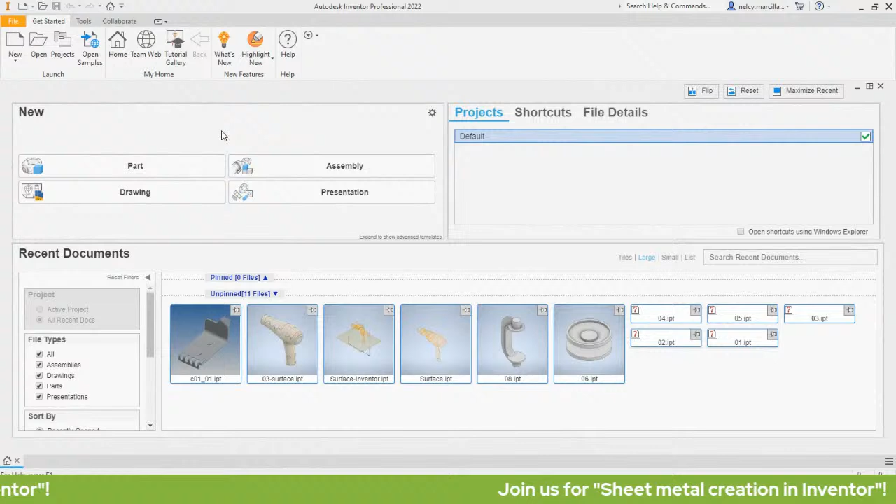Okay, so this is the interface of Autodesk Inventor 2022. First, let's click New. This window will pop up, selecting Sheet Metal millimeter.ipt, and click Create.

Okay, so opening my Inventor. Okay, so let's first...

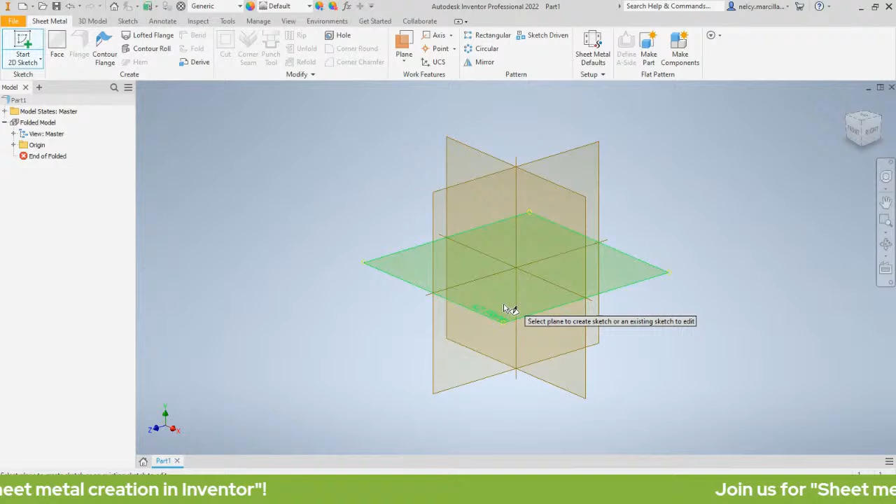Draw a sketch. Head over to Start 2D Sketch. We are prompted to select a plane, so I'm going to select our XZ plane, left click, and we'll be sketching on our top plane.

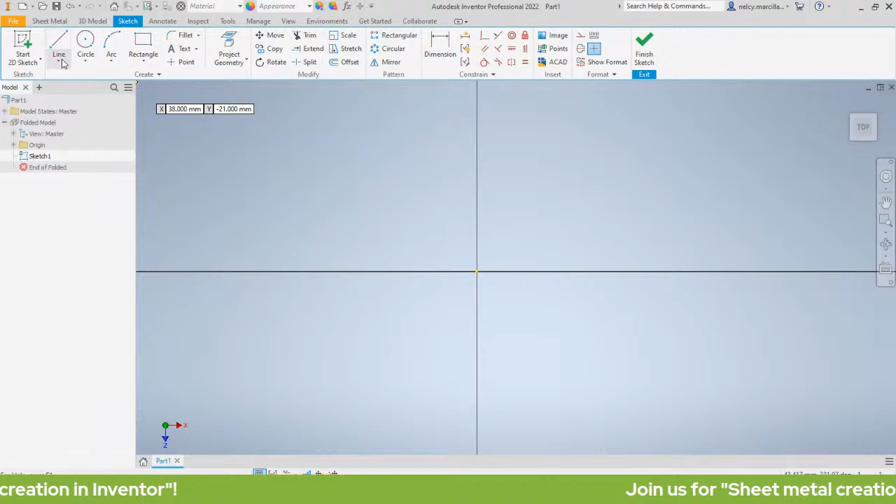Okay, press L for line. L is the shortcut key for line, or you can grab the line tool under the Sketch tab. Let's place our first point here at our origin, left click. Notice the vertical inferred constraint active. Let's double left click to exit the line command.

Okay, so notice line is still active. Let's place another line here, left click, moving it down. Left click, moving it down.

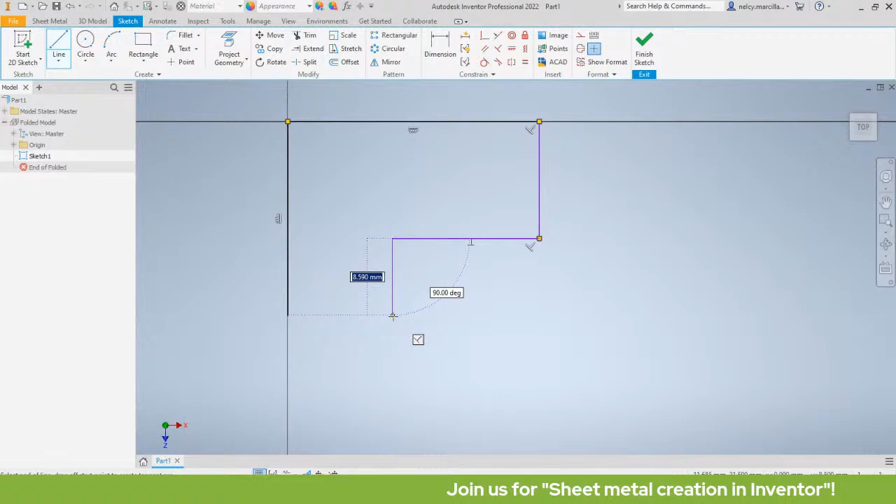So let's do snap tracking. Okay, left click. Let's hit escape to exit. Our next intent is to create an arc here.

Head over to the Sketch tab, selecting Arc. So we have three kinds of arc: 3-point, tangent, and center point. For this one, I'm going to use 3-point arc.

Okay, placing the first point here, left click, and left click. Let's hit escape.

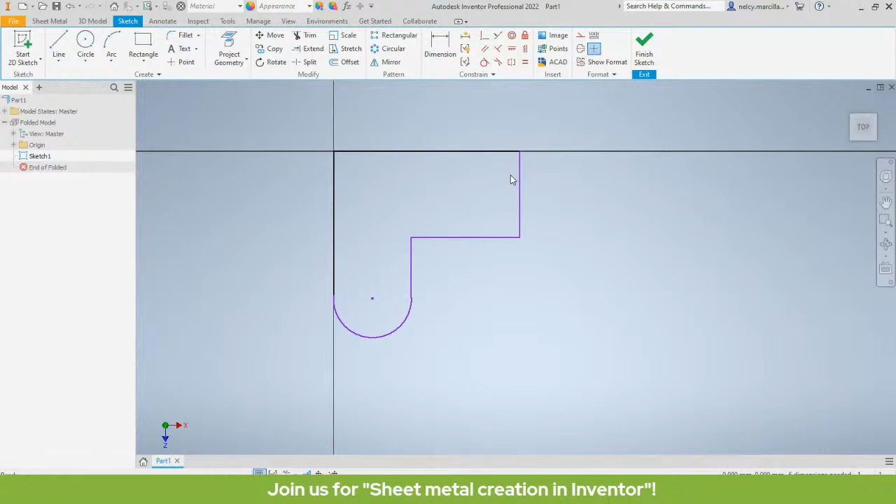Okay, so now notice here, 6 dimensions needed. You can grab dimension here, or press D on your keyboard. So selecting this line and this line, moving it up, left click, let's key in 44.

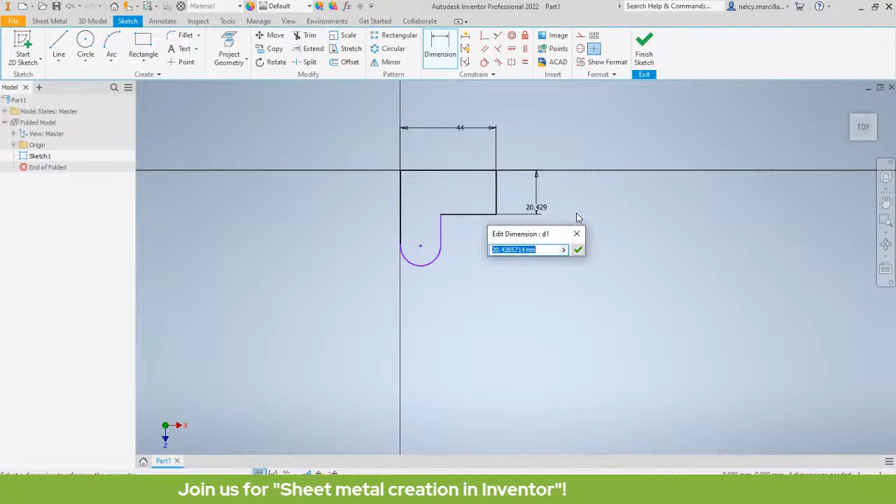This line and the center point of this arc, left click here and key in 32. Okay, so let's now add dimensions to our arc, left click, and key in 4.

Okay, let's hit escape. Okay, inspecting. Okay, so...

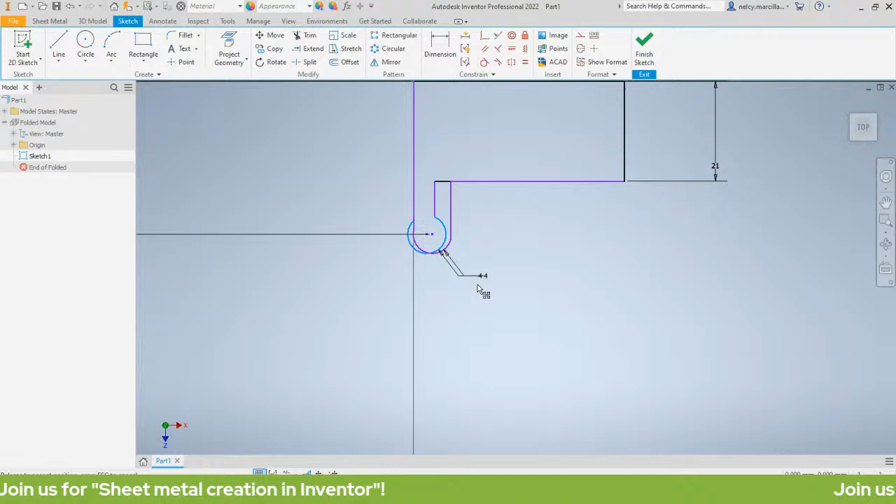What constraints? Post in the comment section: what is the right constraint to make it smooth, to have a smooth transition between this line and our arc? If you know, just post it in the comment section.

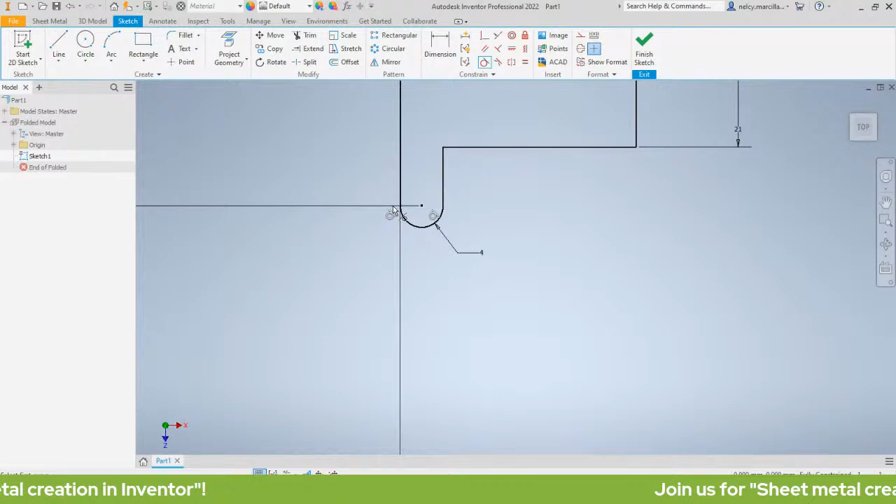Okay, so head over to Constraint. Let's select Tangent, selecting this line and this arc. Okay, this line and this arc. Notice our sketch is now shaded black, and as you can see here, our sketch is now fully constrained.

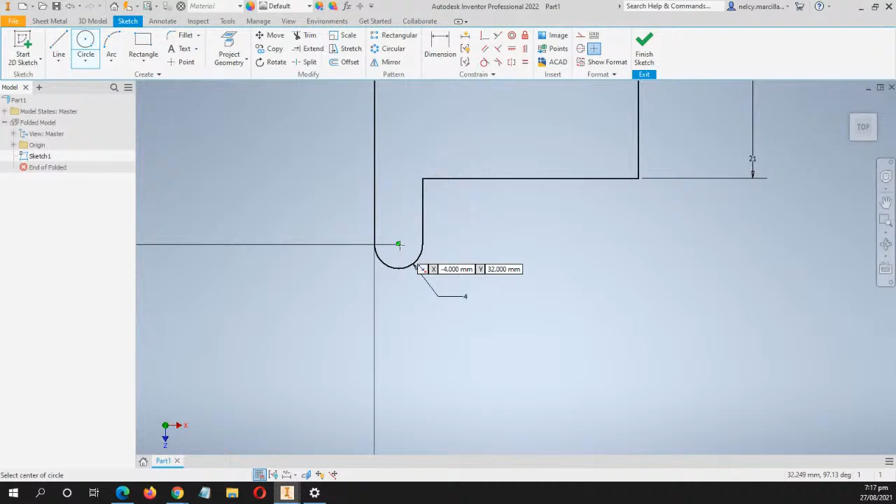Okay, so to finally finish our sketch, we're going to add a circle. Head over to the Create tab, selecting Circle. Selecting center point circle, placing it here, left click, and key in 3. Let's now click Finish Sketch.

And now we are in the Sheetmetal tab, selecting Face, selecting this face, and click OK. Notice here we have the offset direction, so you can flip it, flip side, or make it both sides. I'm going to select the first option and click OK.

Our next intent is to create a flange here. So let's create a flange.

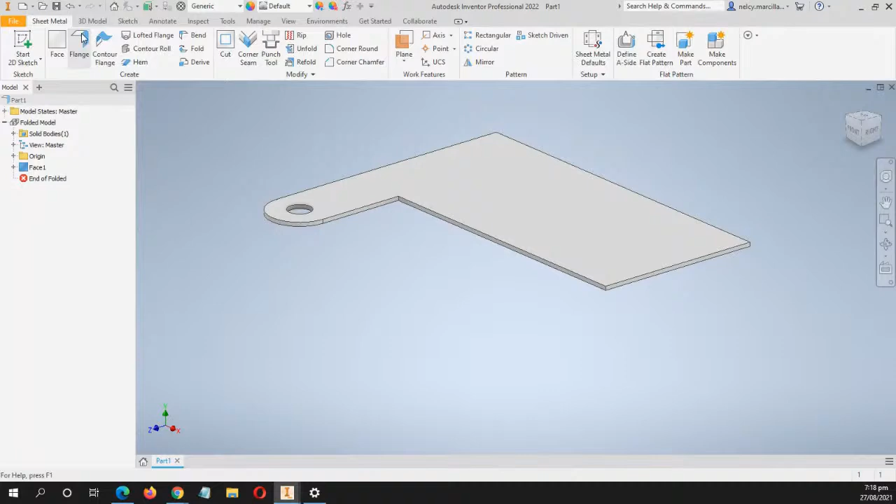Selecting flange, selecting this edge. Let's define the height. Height to be 10, degree to be 90 degrees, and click OK.

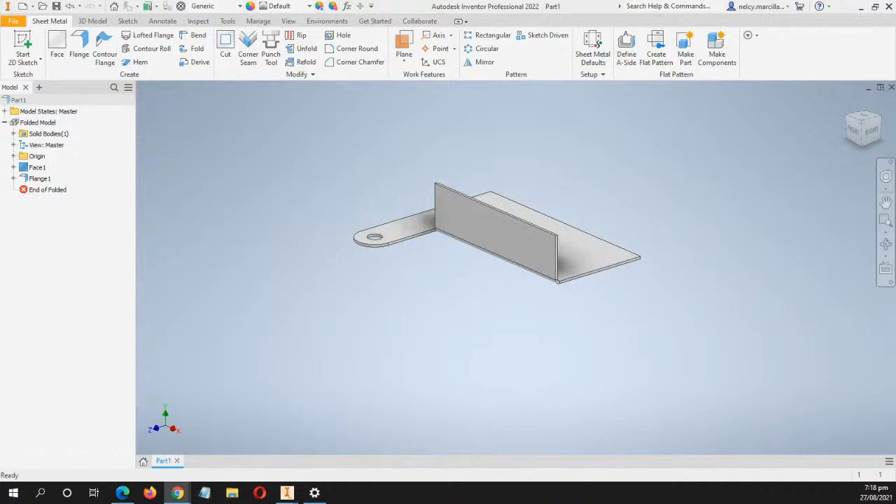Our next intent is to create a cut extrusion here. So let's select this face, right click and select new sketch. Let's arrange our orientation.

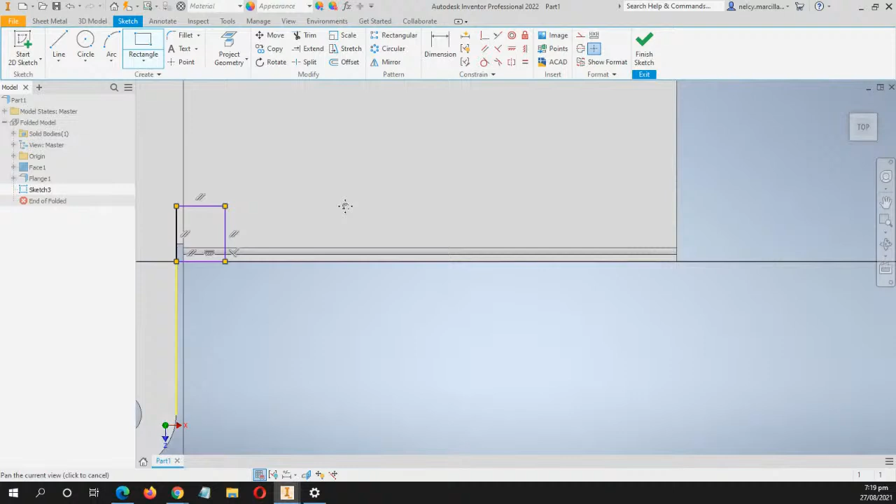Head over to create tab and select rectangle. This time I'm going to use a 2-point rectangle, placing the first point here, left click, and left click. Placing another one here, left click and left click.

Let's hit escape. Let's add dimensions. Press D for dimension, selecting this line and this line, left click and key in 5. This line and this line to be 25. Selecting this line and this line to be 5.

Our next intent is to align these lines. So let's hit escape, head over to constraint, and select collinear. Selecting this line and this line. Let's hit escape. Let's inspect.

Head over to constraint and select coincident. Selecting this point and this point. So let's place a point here. Let's create a point, placing it here. Placing the point here.

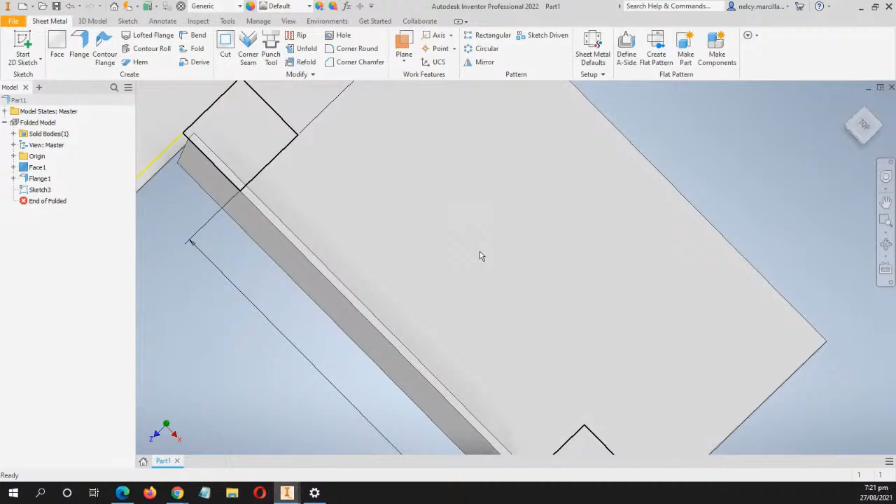Our sketch is now fully constrained. So let's now click Finish Sketch. Let's zoom out. Let's head over to 3D Model tab and select Extrude.

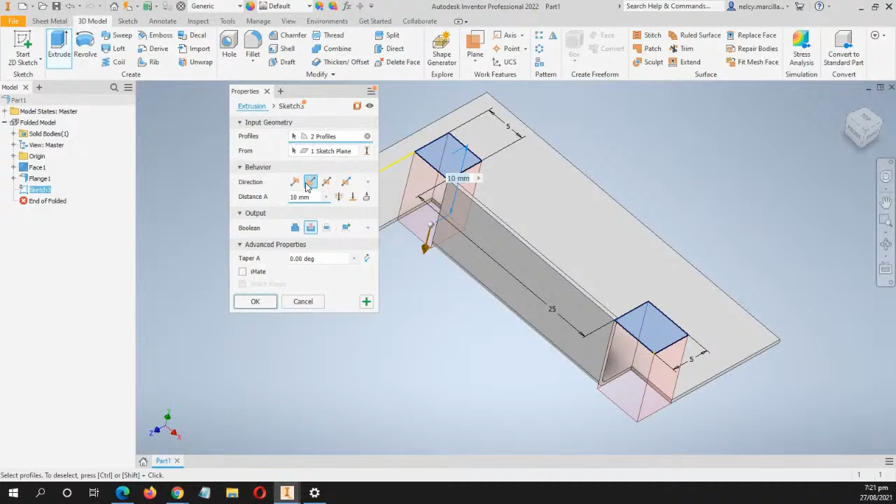Selecting this profile and this profile. So direction, this window will pop up. Direction to be flipped. Notice it automatically changed to cut. Let's now click OK.

Our next intent is to create another flange. To do that, let's head over to Sheetmetal tab, selecting flange. Let's select this edge.

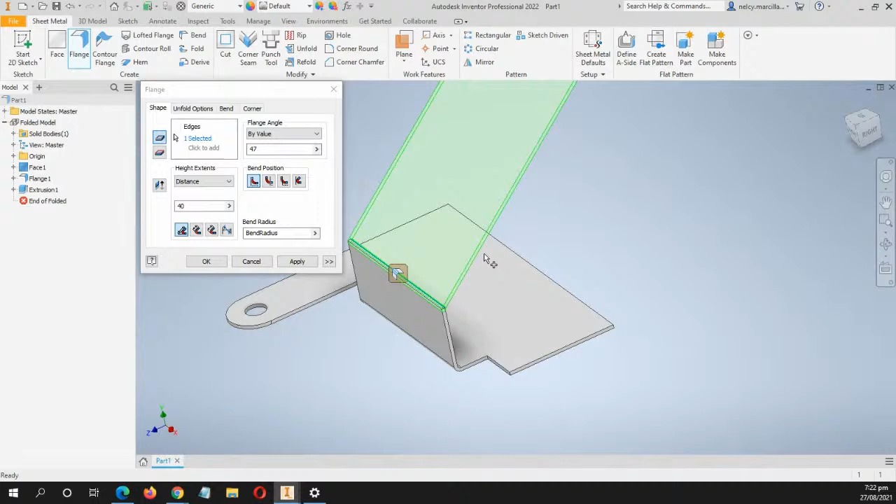Let's key in 40 with the angle of 47, and click OK.

Next, let's create another flange here to this edge. Right click, selecting repeat flange, selecting this edge. For the height extent, let's key in 16. Bend angle to be 60 and click OK.

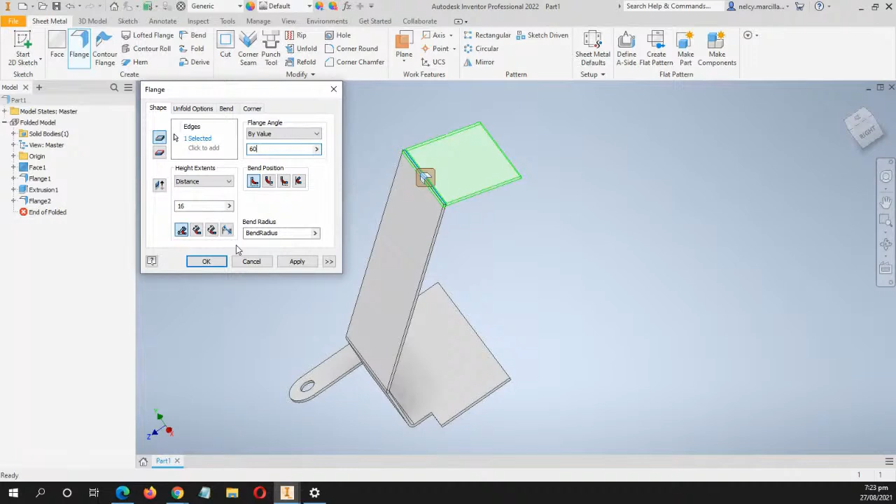Head over to home view. Our next intent is to create a circle. We are going to create a cut extrusion here, but first we need to create our circle.

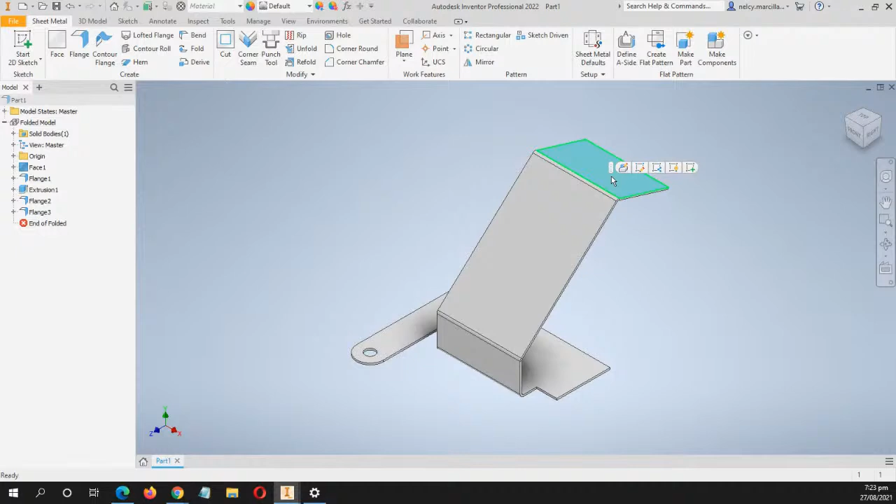So left click, right click, and select new sketch. Let's change, so we are in our top plane. Head over to create tab and select center point circle.

Locating the midpoint, notice the green circle, so that's the midpoint. Let's left click there and key in 15. Let's now click finish sketch.

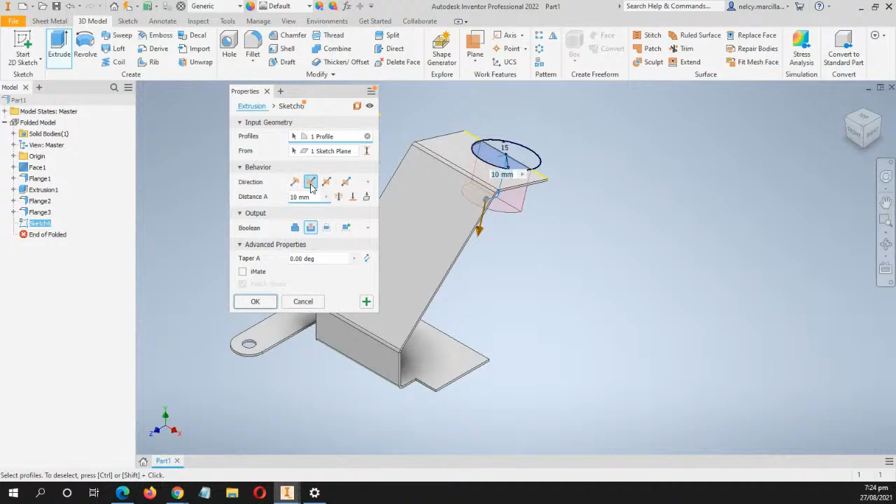Head over to 3D model tab and select extrude. Selecting this profile, direction to be flipped. Boolean to be cut, and click OK.

Our next intent now is to create a sketch on this face. Let's right click, selecting new sketch. Press L for line. Let's create a line here, left click and left click. Let's hit escape. So this line will serve as a helper.

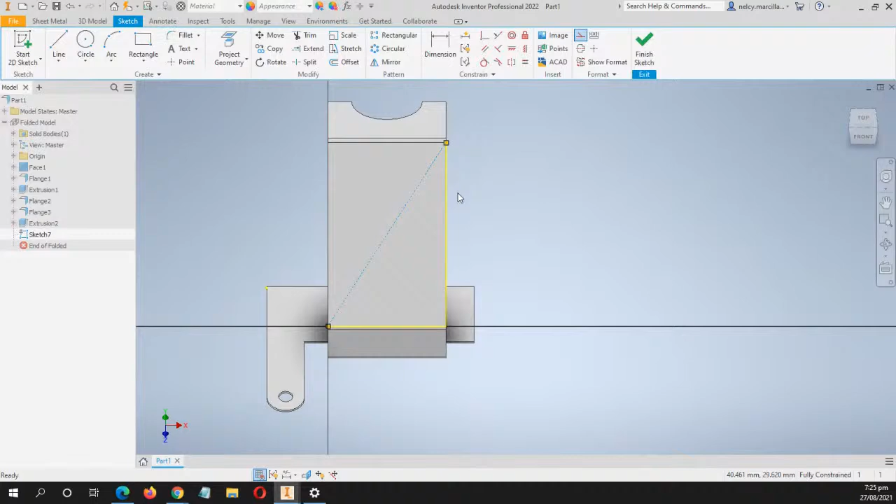So let's left click, right click, and turn it into a construction line. Let's now create a slot.

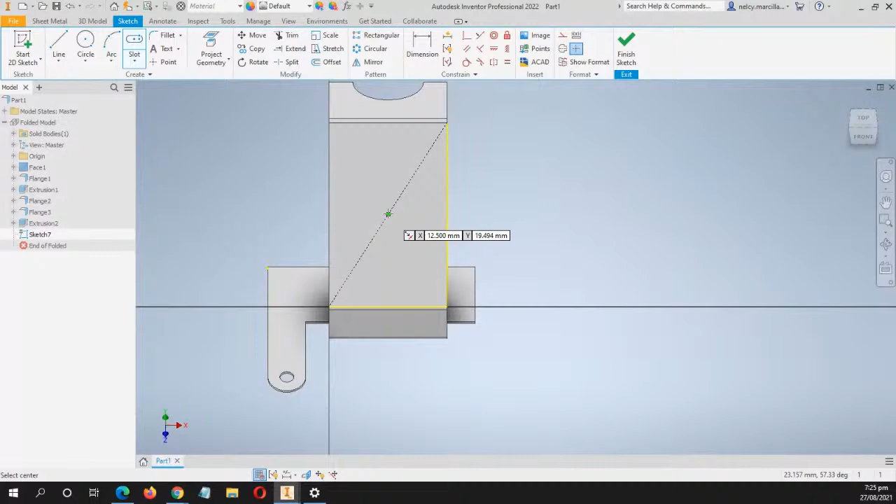Head over to create tab, selecting this drop down and select center point slot. Let's locate the midpoint of this line, notice or locate the green dot. Left click here, moving it up, and left click.

Notice the vertical inferred constraint. So once you see your vertical constraint, that's the time when you need to left click. And left click.

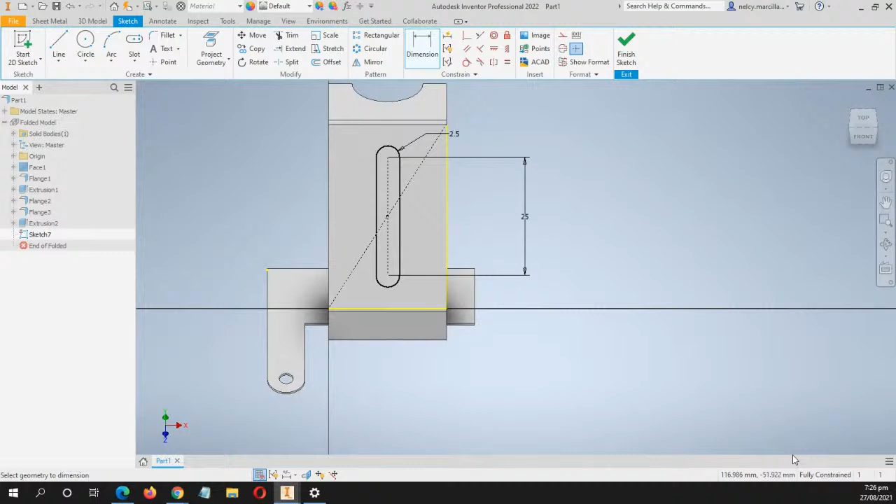Press D for dimension, selecting this line, left click, and key in 25. Selecting this arc and key in 2.5. Our sketch is now fully constrained.

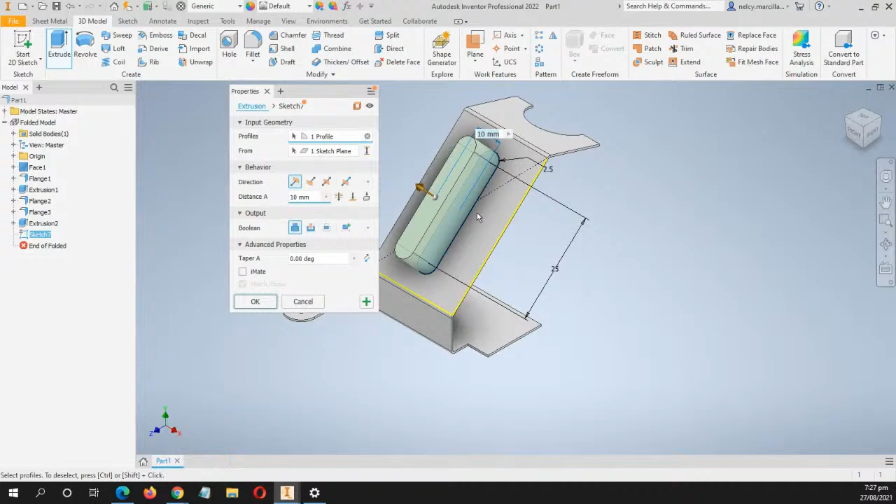So if your sketch is not fully constrained, feel free to use constrain. Let's now click finish sketch. Head over to create under 3D model tab and select extrude. The profile is automatically selected, so direction to be flipped. Let's now click OK.

Okay, so let's create another face here. To do that face, we need to create the sketch. Selecting this face once more, left click, selecting new sketch.

Press L for line, locating the midpoint of this edge, left click, and key in 10. Let's hit escape. Press L once more. Let's create a line here, left click. Notice the horizontal inferred constraint. Double left click. Let's create another one here, left click and left click.

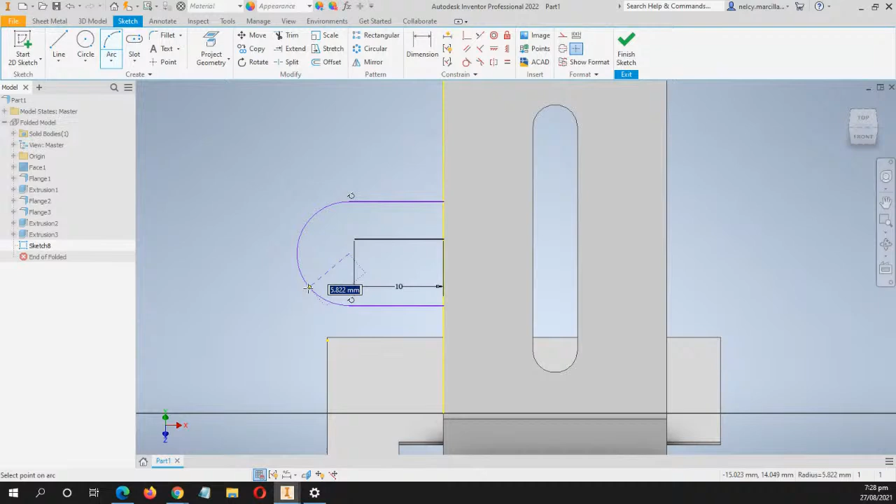Let's hit escape. Let's now create an arc. Selecting 3-point arc, left click, placing it here, left click, and left click. Notice the tangent inferred constraint appeared. I'm going to left click.

Head over to constraint, selecting coincident, selecting the endpoint of this line and the center point of our arc. Press D for dimension. Let's define the dimension of this arc. Let's key in 5.

Let's hit escape. Let's turn this line into a construction line. Left click, right click, and select construction. Let's now create a circle, placing it here, and key in 5. Let's hit escape.

Our intent here is to join the center point of our arc and our circle. So we're going to click concentric, selecting this arc and our circle.

Let's now click Finish Sketch. Head over to Sheetmetal tab and select Face, selecting this profile. Notice the preview and click OK.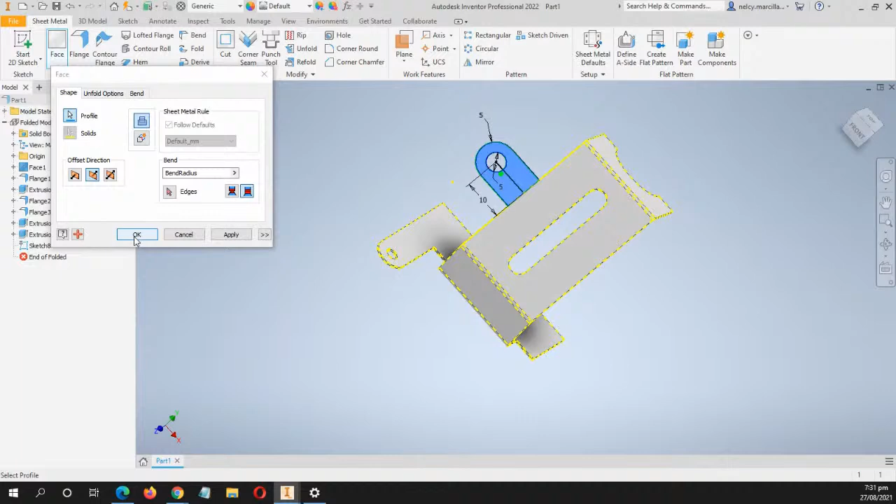Okay, so we are done with our first sheet metal in Inventor.

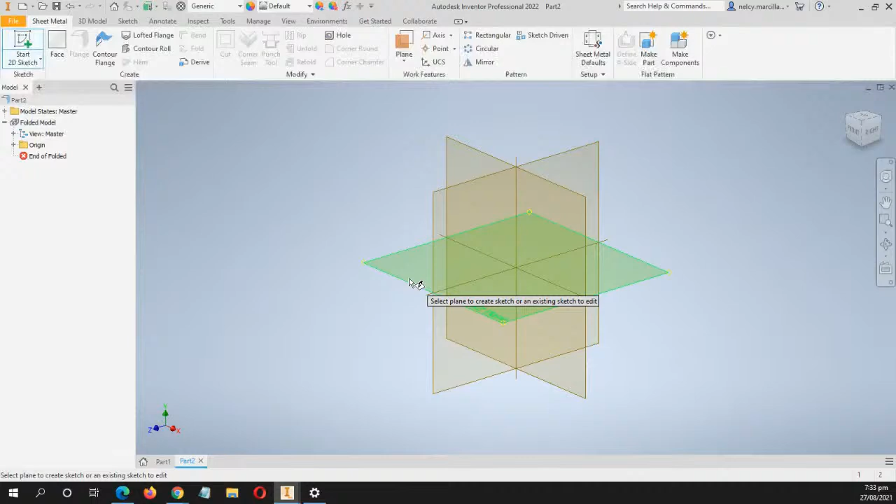Let's head over to home, selecting new, Sheetmetal mm.ipt, and click create. So Start 2D Sketch, selecting our XZ plane, left click.

Let's grab our rectangle, selecting 2-point center rectangle, left click on our origin. We are prompted to input a value, so let's key in 100, hitting tab and key in 50. Zoom in.

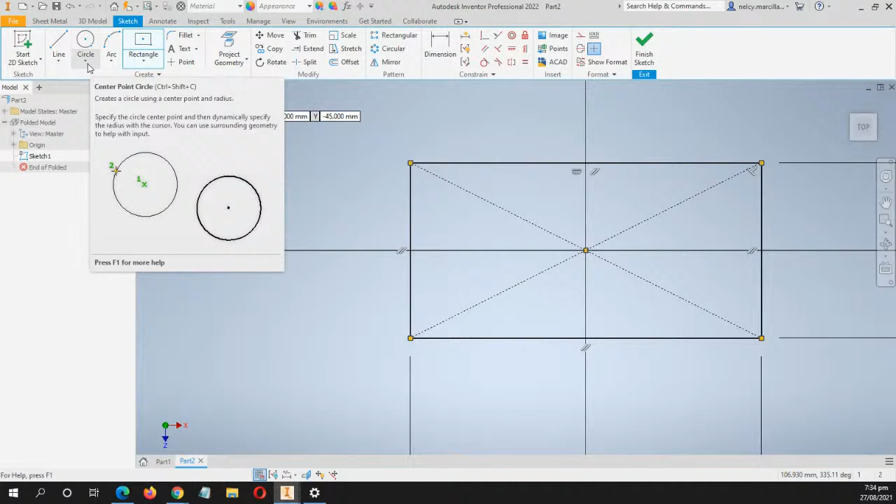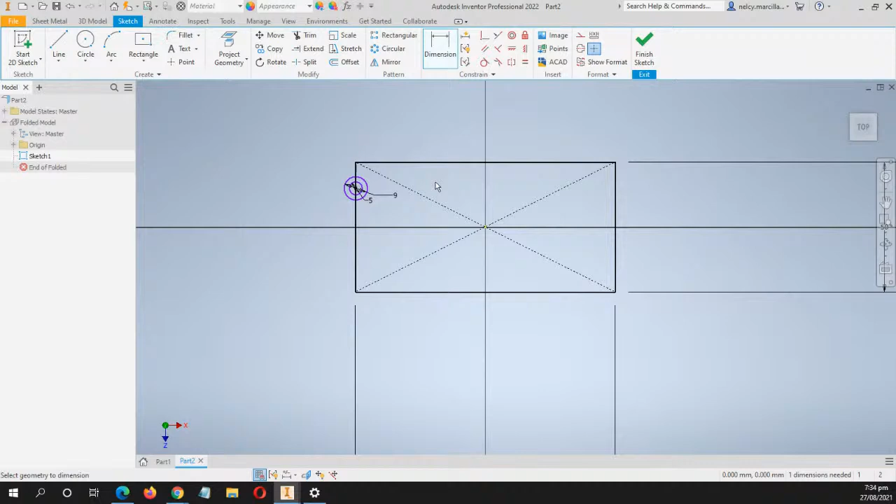Our next intent is to create a circle here. Grab the circle in our create tab, selecting center point circle, left click. Left click here, let's key in 9. Circle is still active. Let's create another one here and key in 5. Press D for dimension, selecting this point and our origin and key in 12.5.

Our sketch is now fully constrained. Let's now click Finish Sketch. Our next intent is to create another sketch on our front plane. To do that, let's click Start 2D Sketch, selecting this plane, our XY plane, left click.

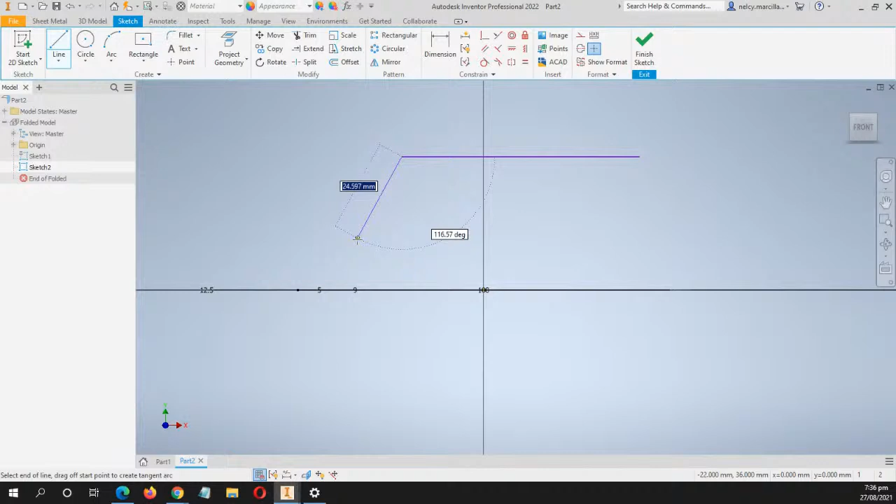Press L for line, left click. Let's left click once you see the horizontal inferred constraint. Left click. Hitting escape, press L once more. Let's create a line here, left click, left click, left click, and hit escape.

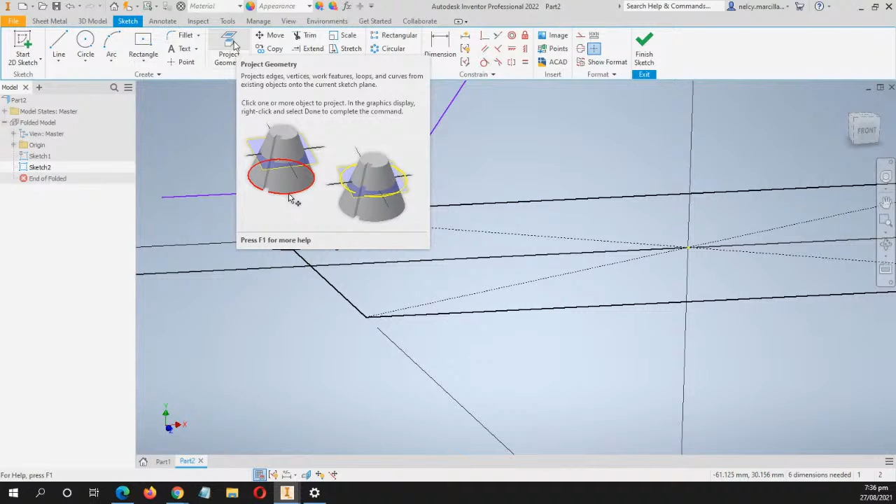Let's now add dimensions or constraints. Head over to constraint and select coincident. We'll place the coincident here, the endpoint of this line and this rectangle. First we need to project the geometry. Head over and select project geometry, selecting this. Let's now head over to constraint, selecting coincident, selecting this endpoint and this point, left click.

Let's now head over to our front view. Press D for dimension. Let's select this point and our origin, left click and key in 42. Selecting this line and key in 60.

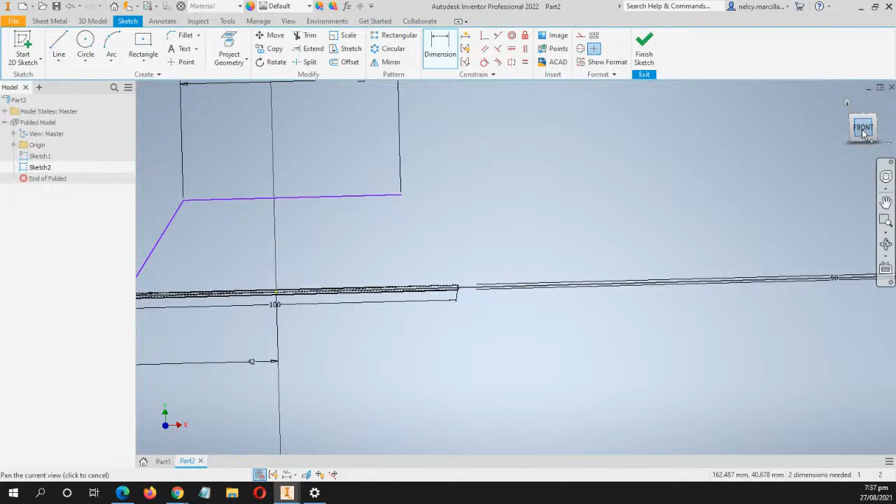Let's now create another line here, which will serve as a symmetry line. Press L for line, left click here, and left click. Hit escape, selecting this line, right click, and select construction.

So let's split this line, selecting split under modify tab, and selecting this. Notice the X mark, left click there. Head over to constraint and select symmetry. Selecting this endpoint and this endpoint and this line.

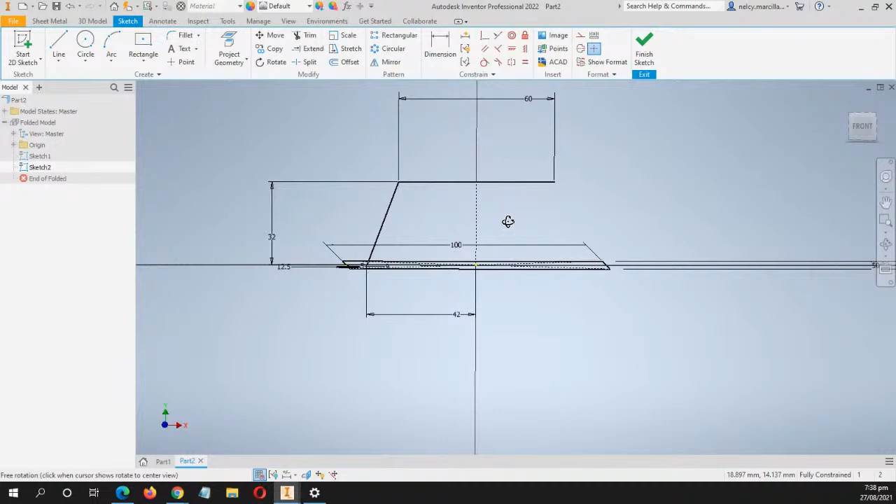Press D for dimension, selecting this line and our origin, left click, and key in 32. Let's hit escape. Front, let's check. Head over once more to modify, selecting split, selecting the X mark, left click. Let's hit escape. Selecting this line, right click and select construction.

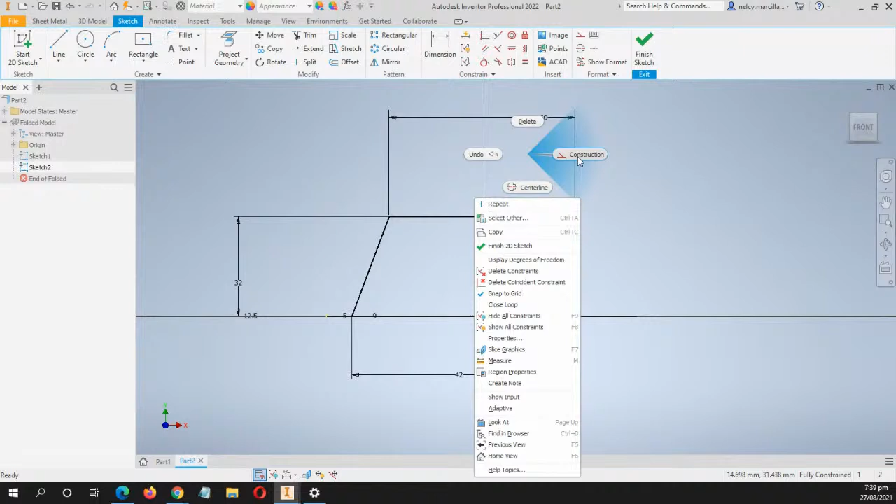Let's now click finish sketch.

This time we're going to create a contour flange. Head over to the Sheetmetal tab, select contour flange, left click. This window will pop up, select this.

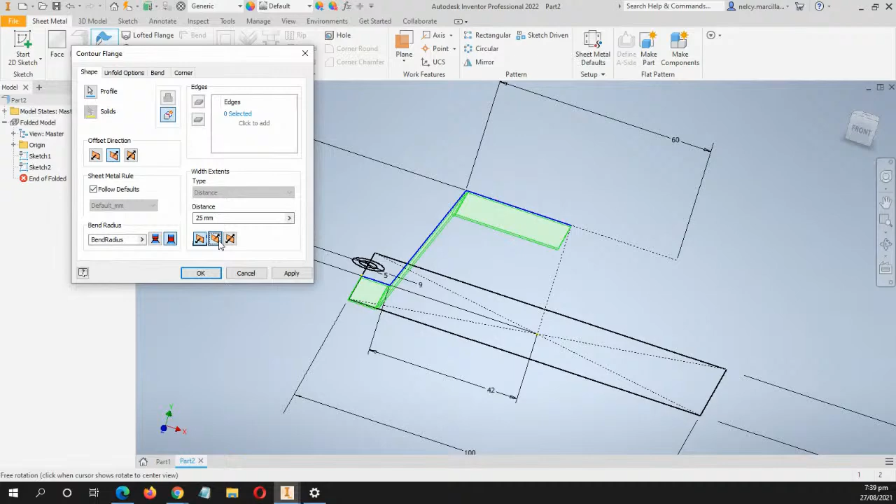For the offset direction, select flip side, and here, distance flip. Click OK. Next, select face, left click, select this profile, and click OK.

Let's turn on the visibility of sketch 1. Right click and select visibility.

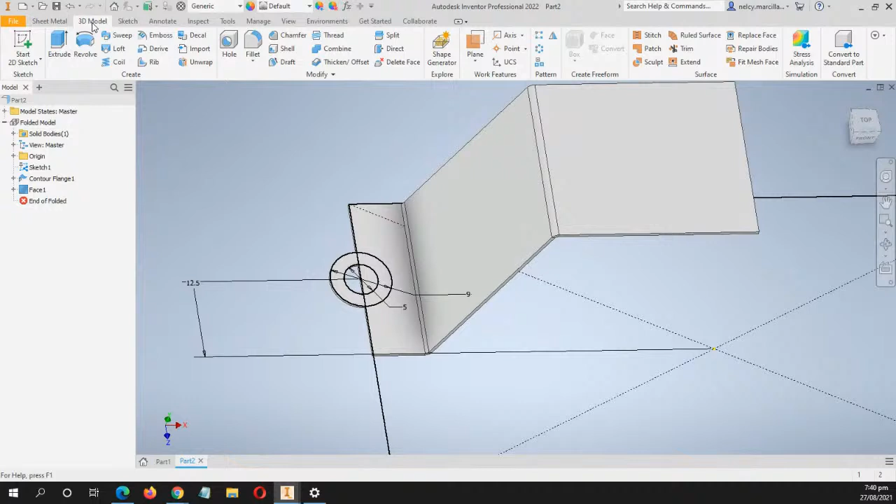Head over to 3D model tab, selecting extrude, selecting this profile, direction to be flipped. Notice, and click OK.

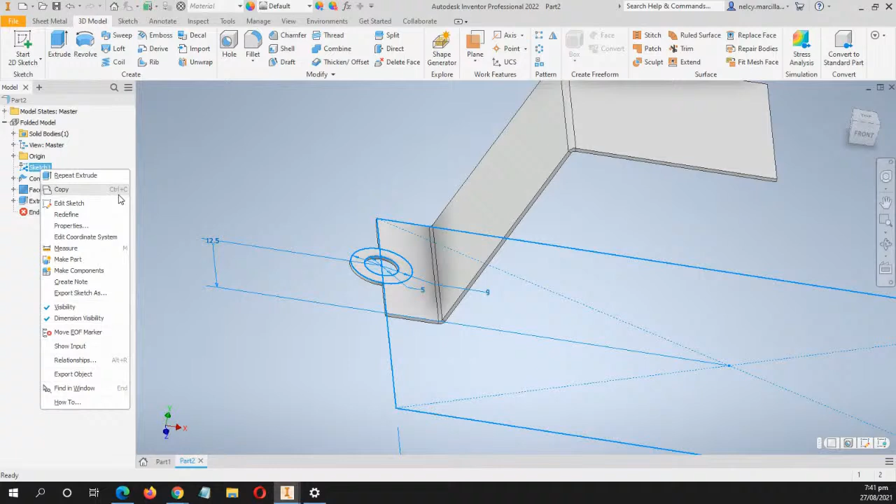Looking nice. Let's now turn off the visibility of our sketch 1. Left click, right click, and select visibility.

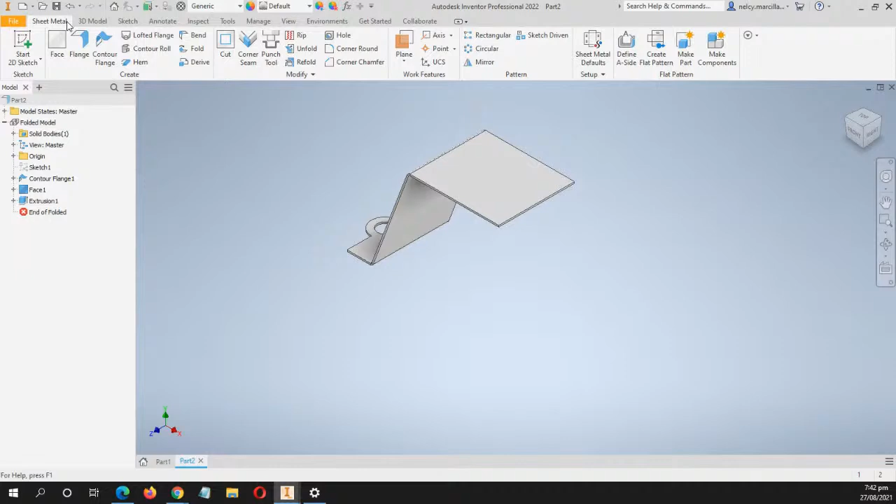Our next intent is to mirror this out. Let's mirror this one. Under modify, head over to mirror command. Let's mirror this one. Where's our mirror command? Under Sheetmetal tab, selecting mirror, selecting this and this, changing it to mirror solids.

For the mirror, selecting this plane, our YZ plane, and click OK. Right click, selecting repeat mirror.

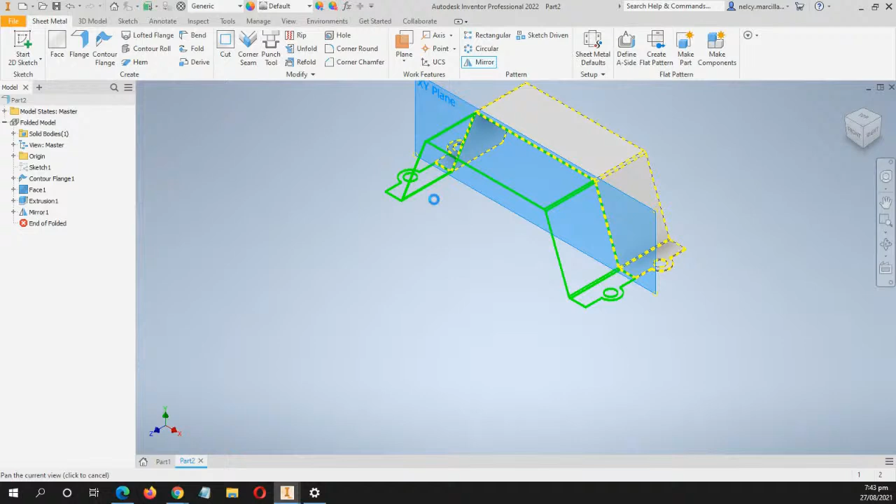Let's select this plane, selecting solid, selecting our XY plane. Make sure operation is join and click OK.

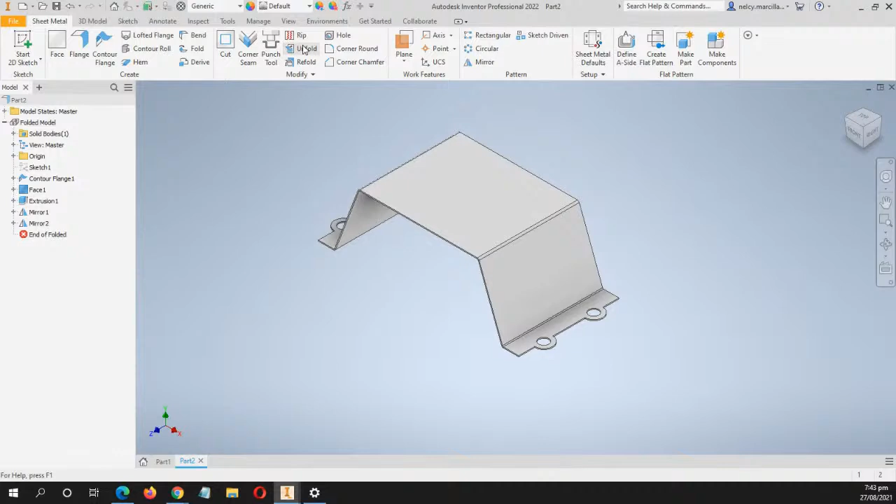Our next intent is to create a cut extrusion here. Before we can create that properly so it will cut the material correctly, we need to unfold. Head over to modify, selecting unfold, selecting this, selecting add all bends, and click OK.

So let's create a sketch on this face. Left click, right click, and select new sketch. Let's create a sketch.

Head over to create tab, selecting rectangle, selecting 2-point rectangle. Let's place our first point here, left click and left click. Let's press D for dimension, selecting this and this, left click. Let's key in 10, you can click the green check mark.

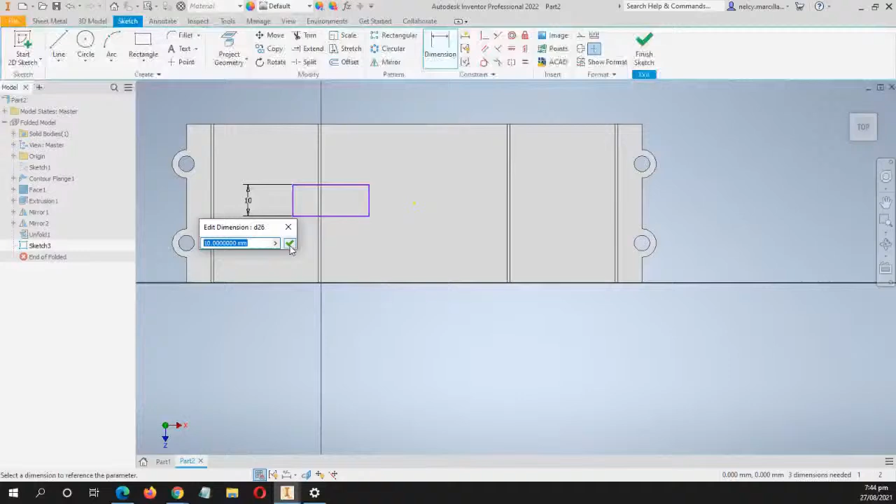Selecting this and this line to be 10. This one and this line to be 10.

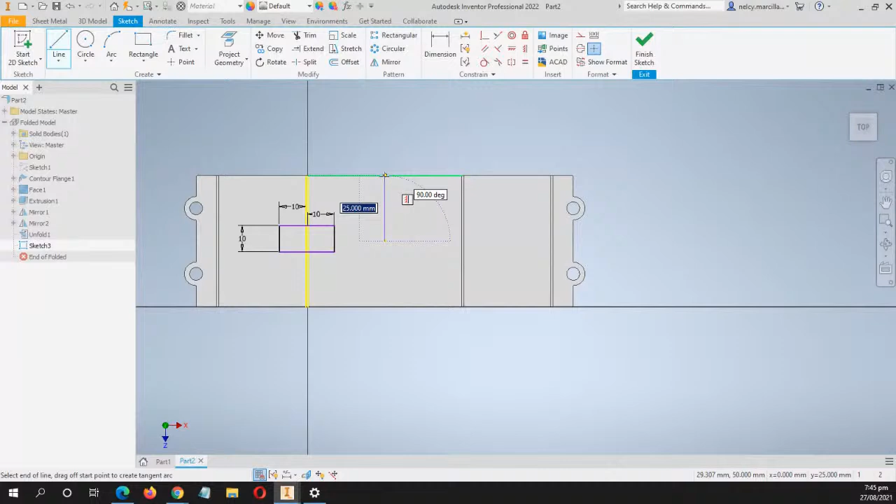So let's now mirror this out. Let's create our mirror line. Press L for line, placing the first point here, left click. Notice the vertical inferred constraint, left click, and hit escape to exit the line command.

Head over to pattern, selecting mirror. For the mirror, selecting this and this. For the mirror line, selecting this line and click apply. Click done.

Head over to constraint and select horizontal constraint. Locating the midpoint of this line, left click, and this line, left click. Let's hit escape.

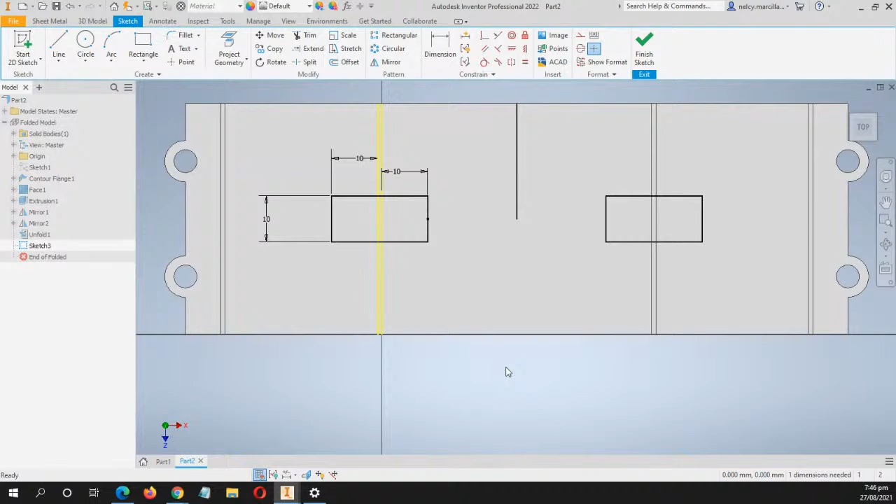Our sketch is now in the shade of black. Let's now click finish sketch.

Head over to 3D model tab and select extrude. Selecting this profile, this profile, this profile, this. Direction to be flipped. Your boolean must be cut and click OK.

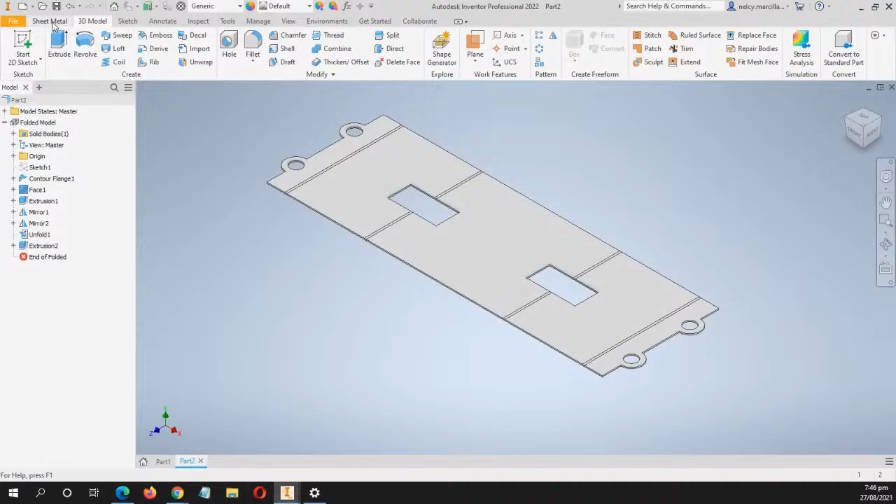So to finally finish this model or this sheet metal, let's add fillets. Head back to Sheetmetal tab, selecting refold, selecting this, selecting add all bends, and click OK. Notice the preview, click OK.

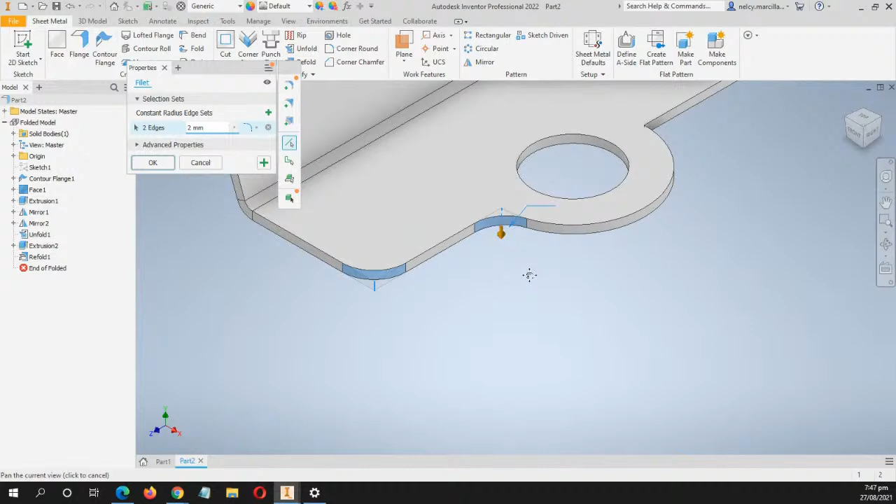Press F for fillet. Let's select the edges. Orbit. Just select the edges.

Selecting the edges. If you have questions, you can post it in the comment section.

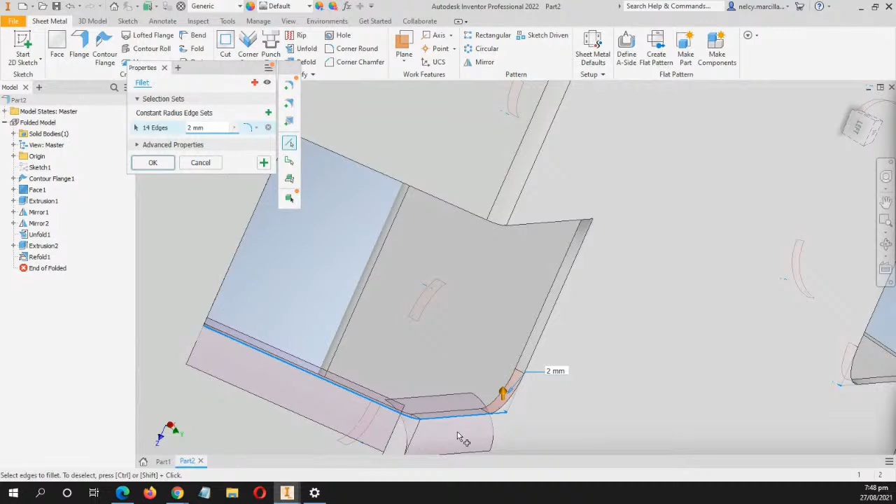Let me unselect this. This one is not included. So you select the edges only. Selecting all the edges.

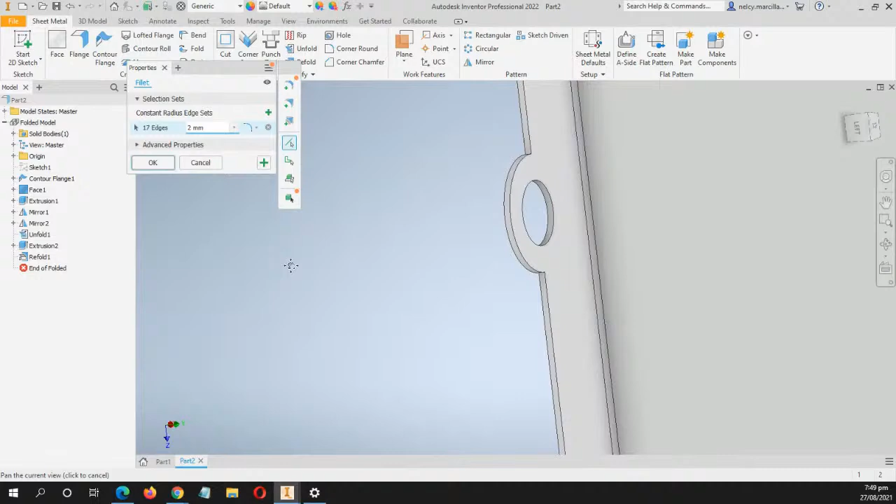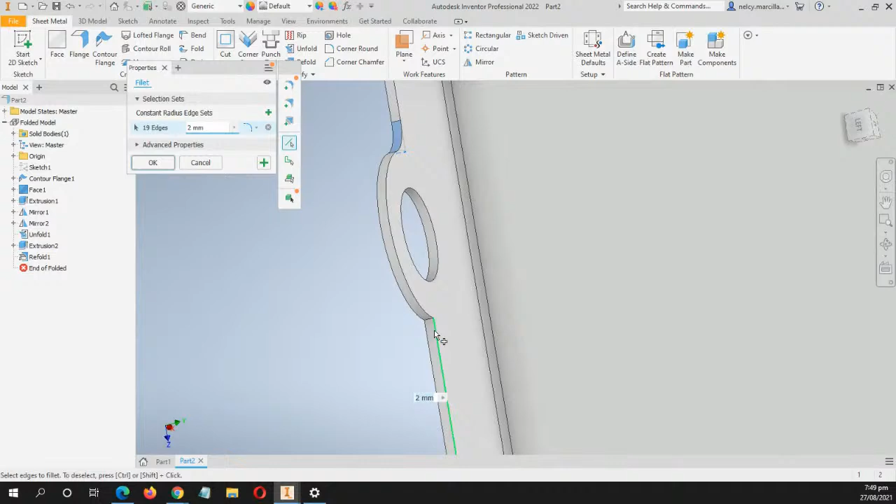What else? Here, select this edge. I think we select all the edges. Oh, here, selecting this one and this one. So 20 edges selected.

Let's key in 2 millimeter and click OK. So that's your second model in Sheetmetal in Inventor.

And yeah, I forgot to add fillets on this model. So same procedure, you can press F for fillet. Let's press F for fillet, and just select the corners or the edges.

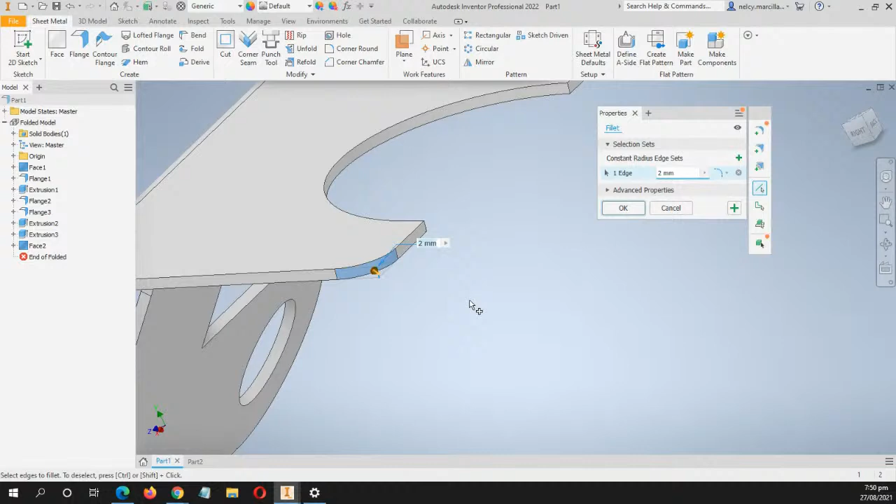Selecting this. Just add fillets to your first model.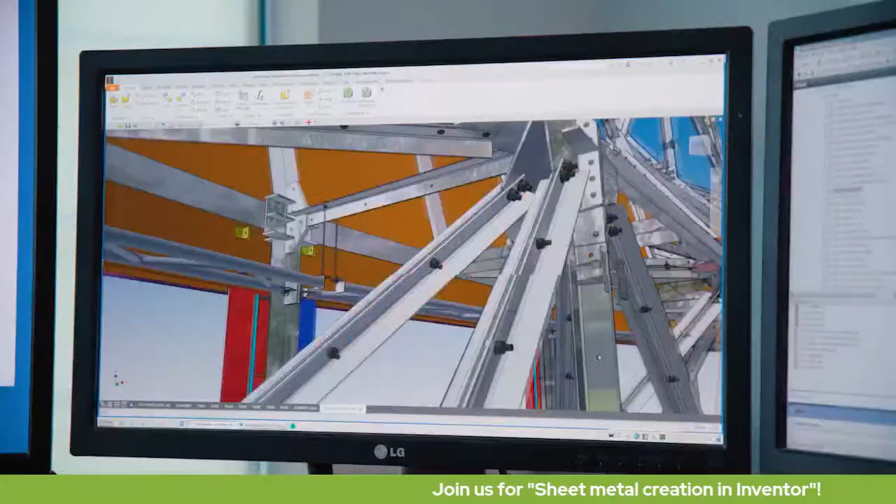Autodesk Inventor is a complete design and engineering solution, helping you and your teams stay connected from design to manufacturing. Inventor provides you with a stable and responsive environment as you create large assemblies and complex product designs.

Whether you are designing industrial machines, complete production systems, or custom fabricated designs for BIM, Inventor delivers the tools needed to get your projects to production faster.

Inventor has a complete set of tools to speed up your modeling process, from sheet metal, welded frames, tube and pipe, electromechanical, mold tools, and direct access to a robust content library and engineering calculators.

Shave days off your projects by rapidly configuring products and minimizing repetitive tasks using iLogic design automation technology.

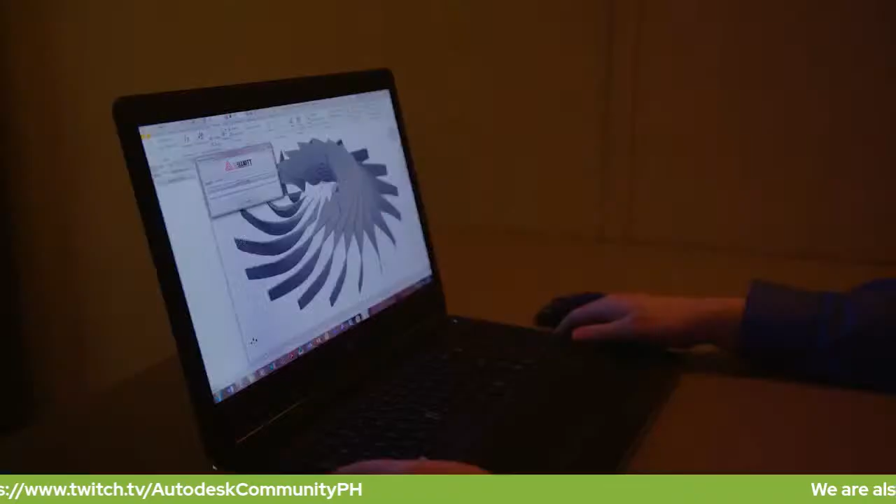Facilitate faster collaboration among teams and vendors by using a secure cloud-based design review tool that protects your intellectual property. Connect directly with AutoCAD for your product design and manufacturing workflows.

And if you subscribe to the collection, you will also get integrated tools for advanced simulation, CAM, factory planning, and high-end visualization.

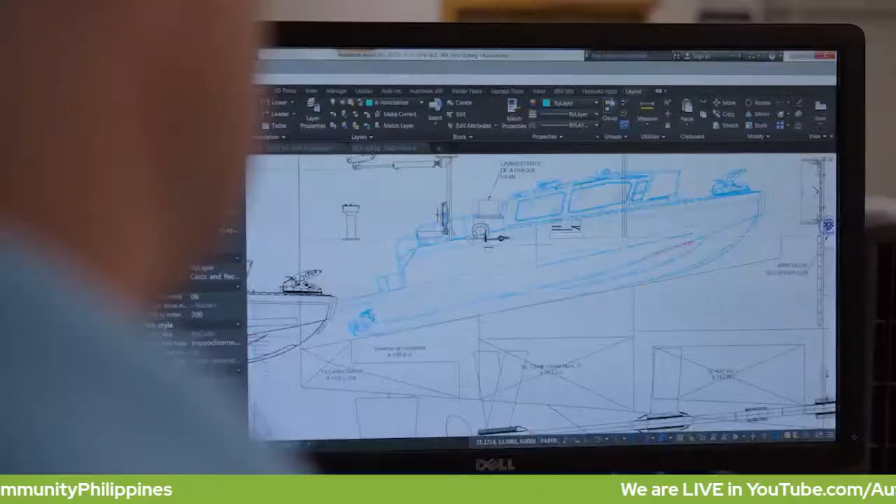Regardless of what you make, be it rockets for aerospace, high-performance boats, or high-efficiency air compressors, all over the world our customers depend on Inventor as their complete design and engineering solution. Accelerate your product development today with Autodesk Inventor.

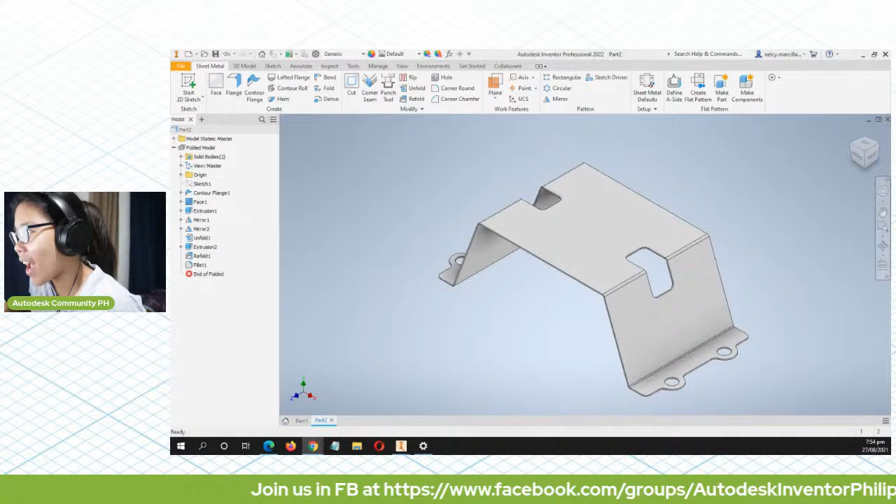Okay, no questions. Yeah, thank you for posting your comments, right? Ivan, Phil, Harold, and Ray. And Ryan, so your names are all familiar to me.

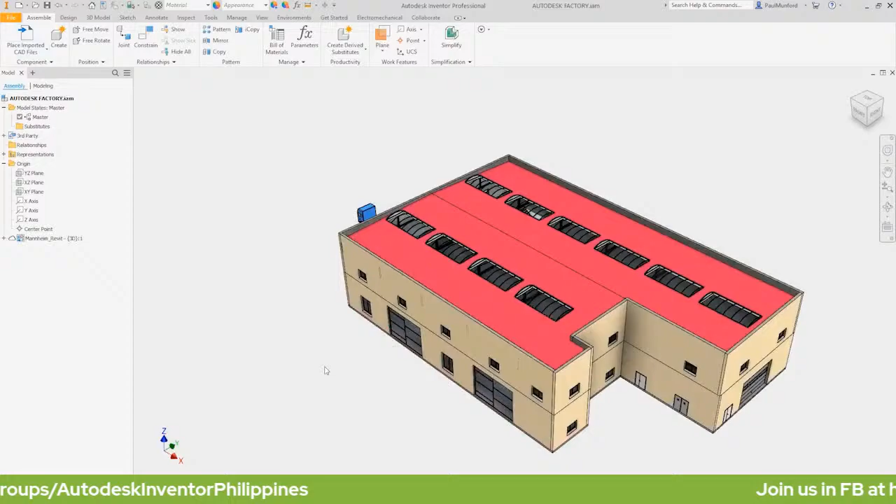The Revit model can be shared as a file or managed with Autodesk Vault or Autodesk Construction Cloud. We can select which view we'd like to use from the Revit model, or we can directly select which categories we'd like to see inside Inventor. We can now use the Revit model as a design reference, using Inventor's assembly relationships to drive the location and dimensions of our Inventor model.

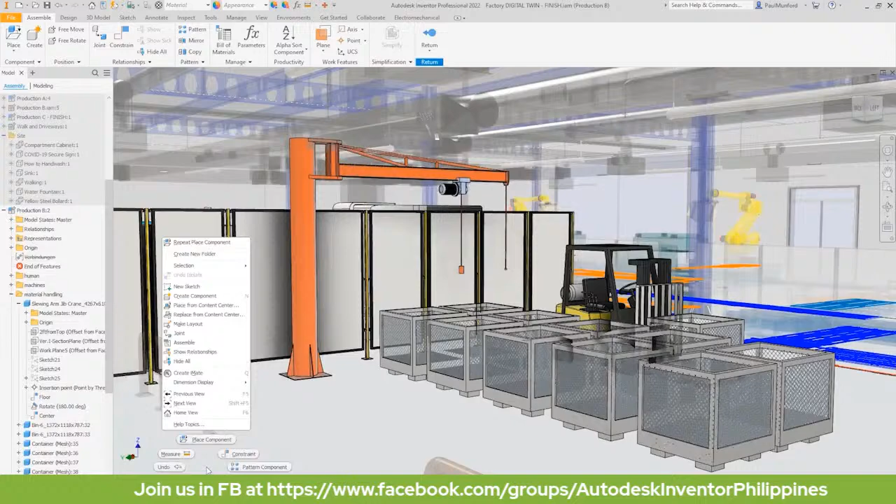When the model is updated in Revit, Inventor AnyCAD will update the reference inside Inventor, keeping the two models in sync. When our design is complete, we can use Inventor's simplification tools to reduce the complexity of the manufacturing model to the requirements of the BIM project. We can then export a Revit project, or RVT file, directly from Inventor, which can be shared as a file or managed with Autodesk Vault or Autodesk Construction Cloud.

Inside Revit, we can link in the project file we created with Inventor. Unlike Revit families, which represent individual components, our project file is placed using the coordinate system that we've shared between Revit and Inventor. This guarantees that our model will be in the right location for collaboration and review. The impact of the Inventor model on the Revit design can now be assessed and necessary adjustments made.

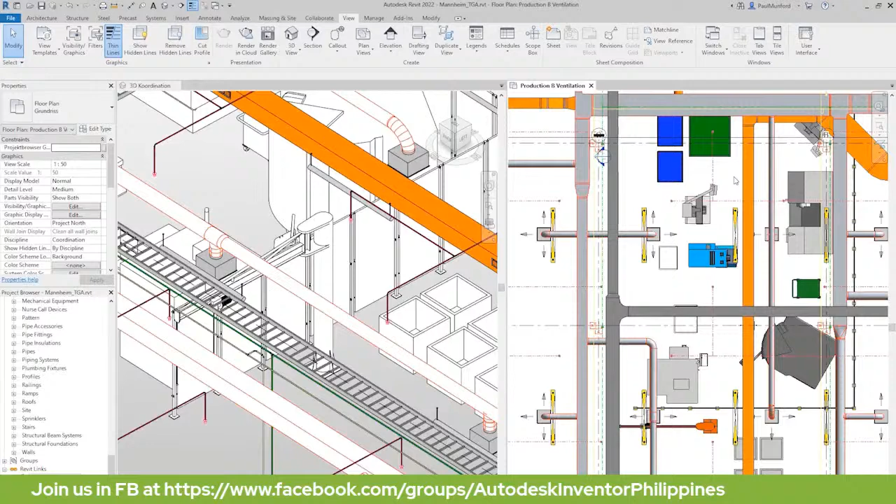Feedback can be given and an updated Revit model can be shared. The Revit model reference is automatically updated inside Inventor via AnyCAD and the impact assessed. If necessary, we can continue to round-trip the Inventor and Revit models until the coordination process is complete. Autodesk Inventor 2022 continues to provide unique functionality, helping manufacturers and construction professionals to collaborate using a shared data model.